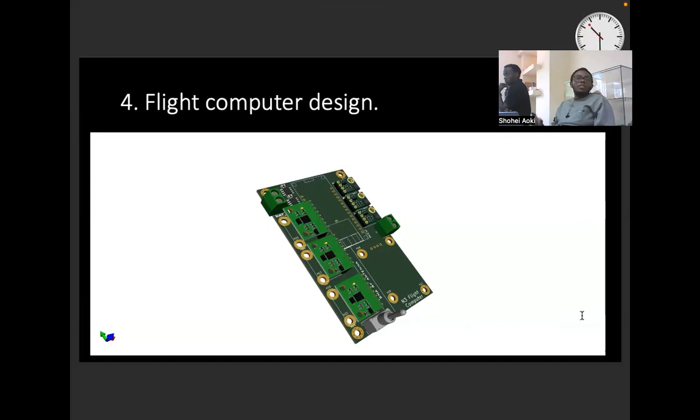Yeah. Assuming we're using the gyroscope, we have 3 of them, each with their values. You have 3 pieces of gyroscopes? Yeah, you'll see it in the image of the PCB design. Using the 3 values, we take the median, then work with that. I see. You have photos? Yeah. You can see the 3 gyros. That was the design. And the next is another, the same. I see. So next, the flight computer now.

We were relying last time on only one signal from one source to do the ejection. This time we don't want that, so we have to be sure that at least a signal has been sent for the ejection apparatus. So we are switching modes effectively, so that in case one does not receive the signal, the other will push the signal for ejection. With this, at least we are sure that the ejection signal will reach and the destruction will be there.

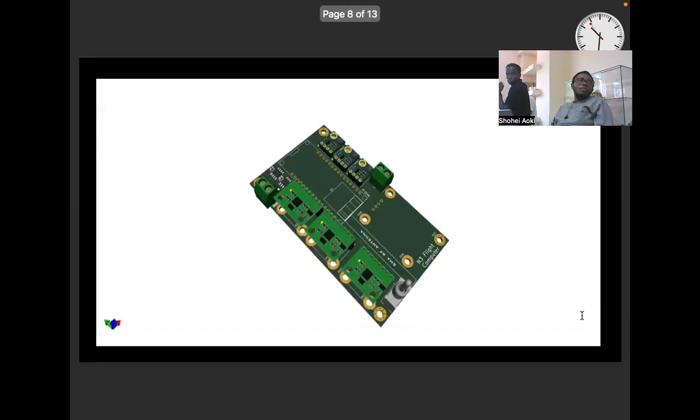So it's actually done, okay. Maybe later I want to see the circuit diagram or schematic, because I want to check the connection of these two MOSFETs.

Yes, I was just curious how this two MOSFETs redundancy works. So you are saying that if one channel is not working, another channel or MOSFET can take over and trigger. Yes.

So we have two MOSFETs for the ejection. The primary MOSFET is supposed to eject. It ejects, and there's a flag in the code that says the ejection has been done. So after a few seconds, as we descend, we can check that flag again, whether the primary MOSFET ejected. If it was ejected, then it's not a problem. But if it wasn't, the second MOSFET has to take over.

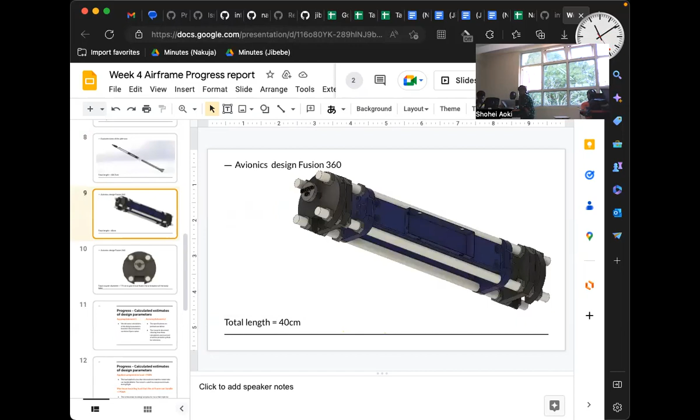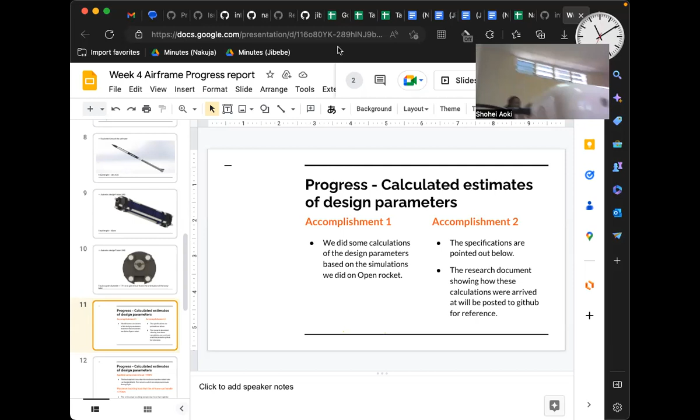Another concern is if the parts aren't assembled properly, it's very sensitive and susceptible to issues - like for instance, if they need to connect, it doesn't actually connect properly. So my concern is if you use styrofoam to create a shock absorber, we might mess things up. We might fail to connect it properly.

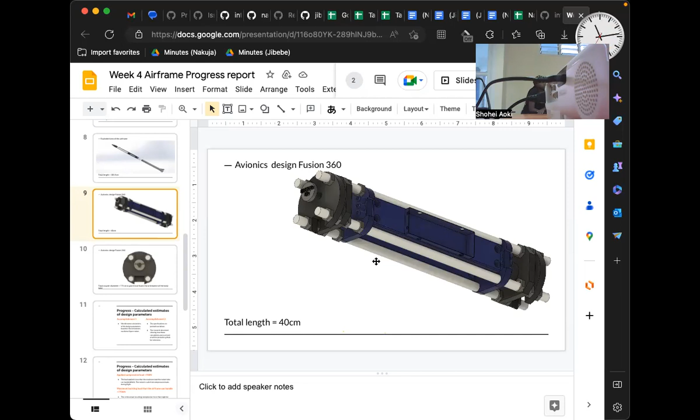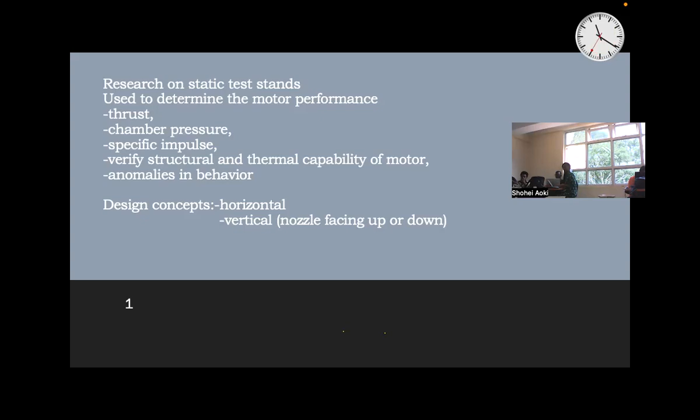So there are three design concepts to consider. There's the horizontal, where we have a motor horizontal, that should be the stand, that is somebody's design we want to use. We also have the option of configuring a stand with the nozzle facing up, that's the development, that's the one we can do. We also have another option, nozzle facing down, integrating one facing down.

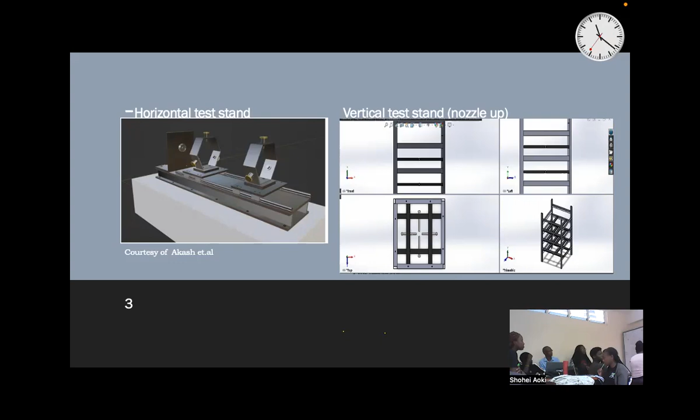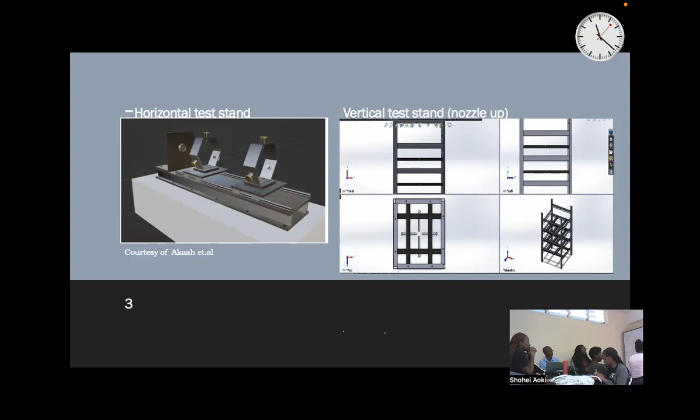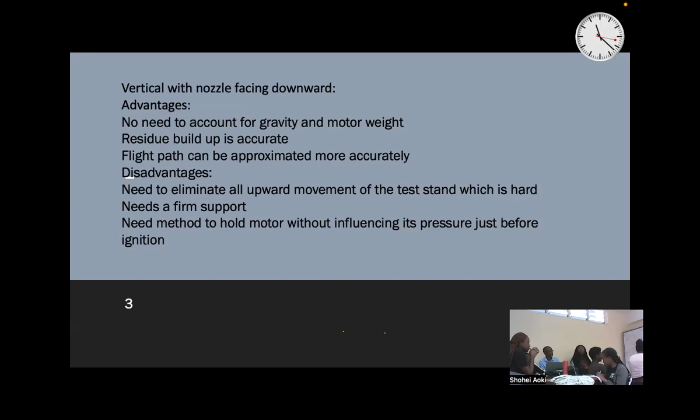So this week we want to design, then models, and then we continue for discussion because we feel like we're taking more time than expected. Last week we finished working together on the motor, with communication with our team on the program. We already identified areas to source materials for the motor, except the casing. We've only been finding out about learning basically the casing. We can really have the idea that we drill and then... it's good.

Have you completed the design of the solid motor? Yeah. Do you have the open motor simulation file? So on GitHub, which one?

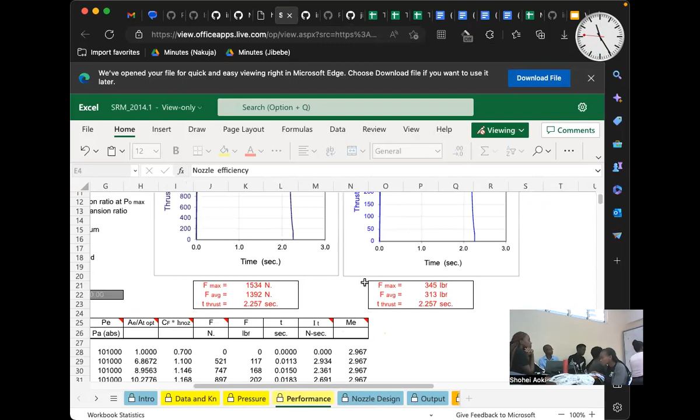So initially we were using 4 cartridges, plus one program, but that was before we understood what the other teams were doing. So then we got the information that the FM team were considering aluminum. So we had to take into consideration their weight. So we started with assuming a thickness of 2 millimeters for their side. We calculated the weight using aluminum 6061.

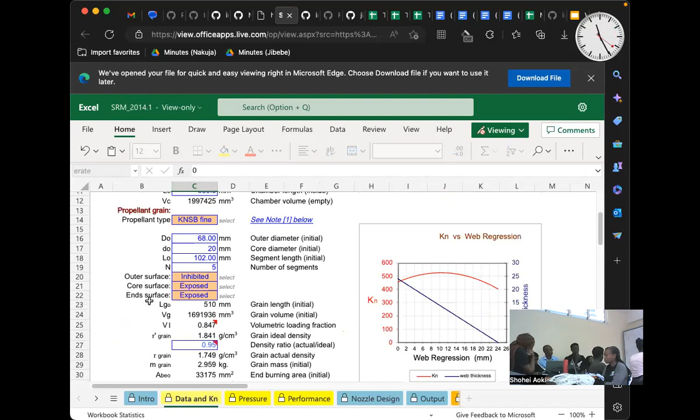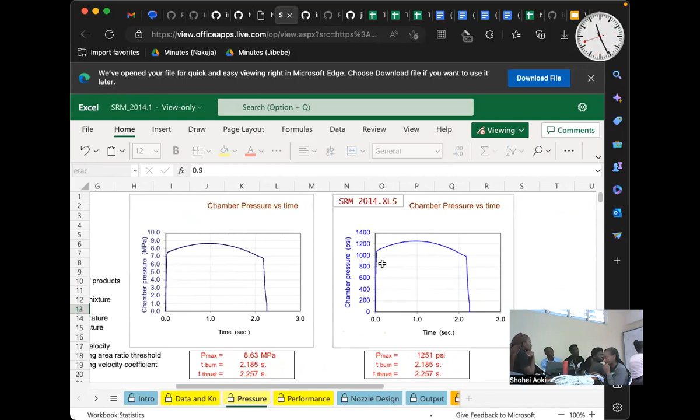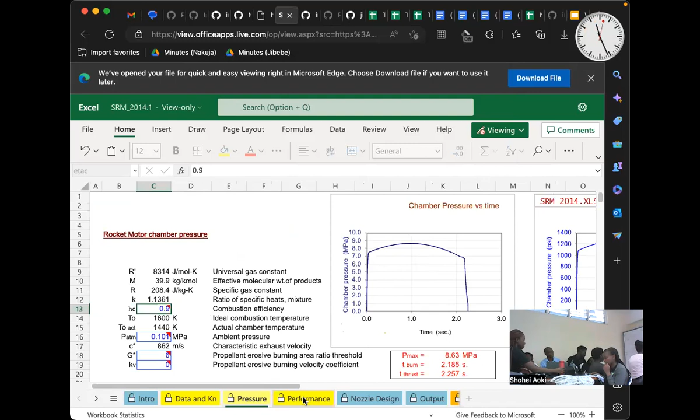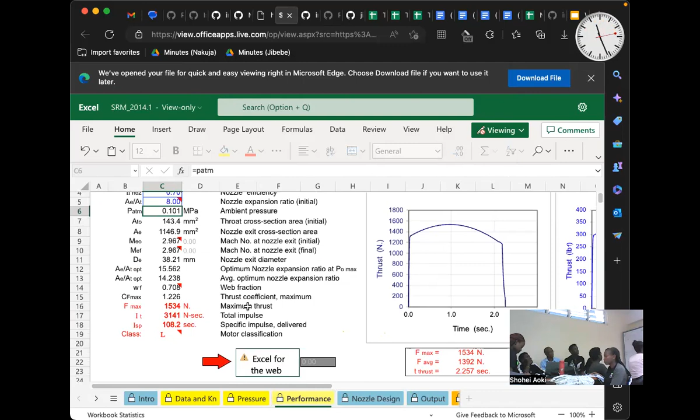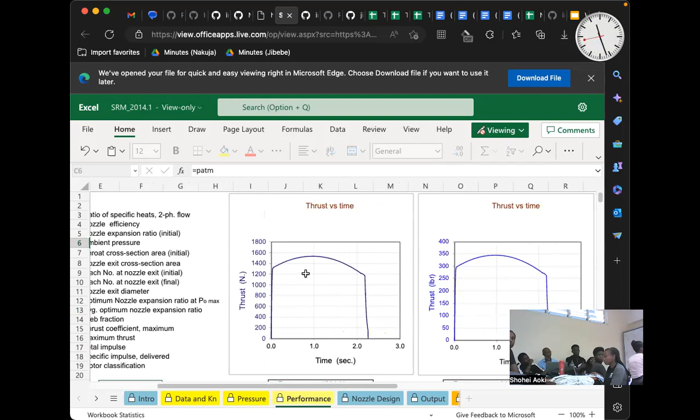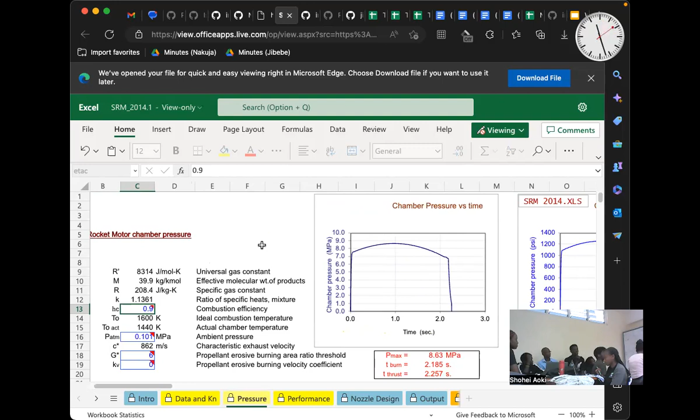Do you remember the maximum pressure for the N2 motor? 5.4. Okay. So it's 8.5 now. It's increasing, right? Yes, the pressure has increased, but we accounted for the pressure because we're using a 3.5 millimeter wall thickness, aluminum 6061. The weight is around 1.2 kilograms, which is accounted for. So the total weight from our side is about 6 kilograms.

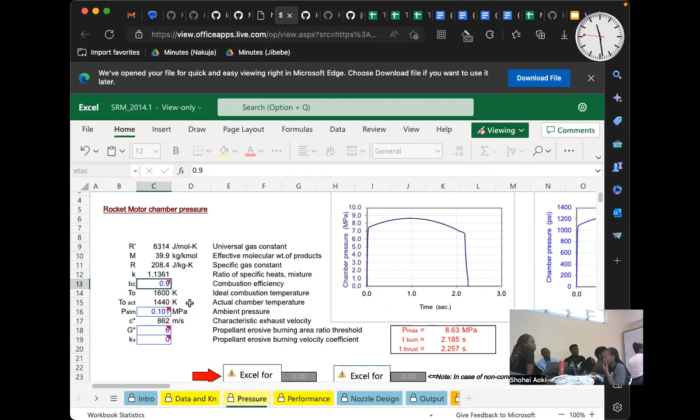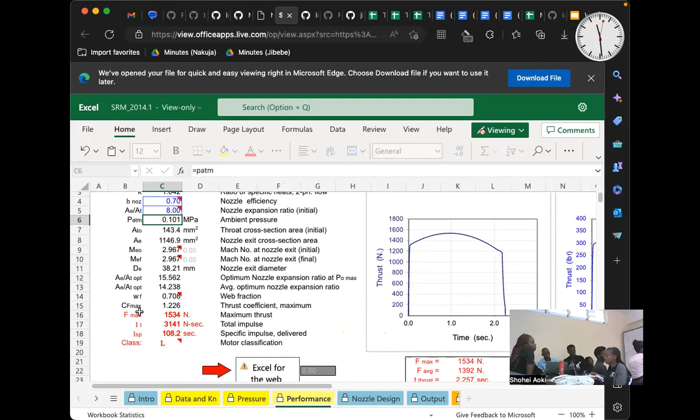Essentially, this is the one that you are still using. The only thing that changed is the design. The design that I have now is L1.3. L1.3, is that the one that you're using? Yes. The mass is 4.674 kilograms. And now the mass is 9.9 kilograms. The one you have is 6 kilograms. It's way higher. Here, the one you have is 5 something kilograms.

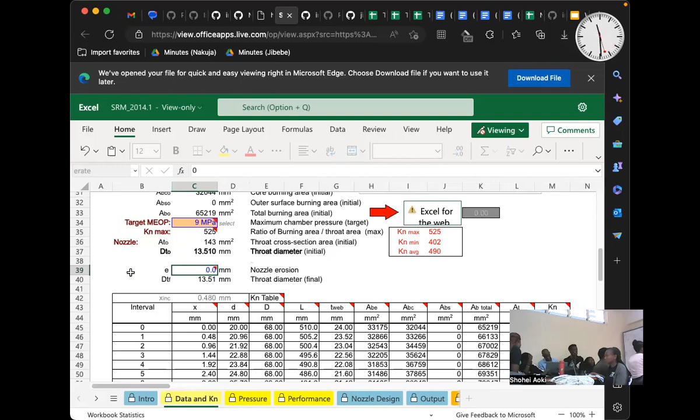In your calculation for weights, you have not accounted for the casing. That is approximately what we get when we take into consideration the mass of the rocket, and yes, that's it. But adding everything, it comes up because you're using a steel body. Actually, if you check it, you will see the reason.

So we believe that we're going to create an Excel file that we can upload, where we can put all the specifications, and those will be the set specifications we want to get from them, so that you can rest assured we won't change anything. I believe that's a better way. We want to make sure the amount of thrust that we need to reach 2,000 meters. If the values are not going to change, we will need to go back to OpenMotor and possibly reduce the weight.

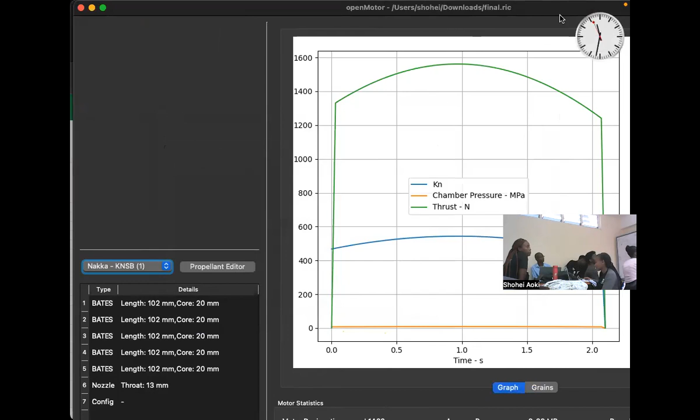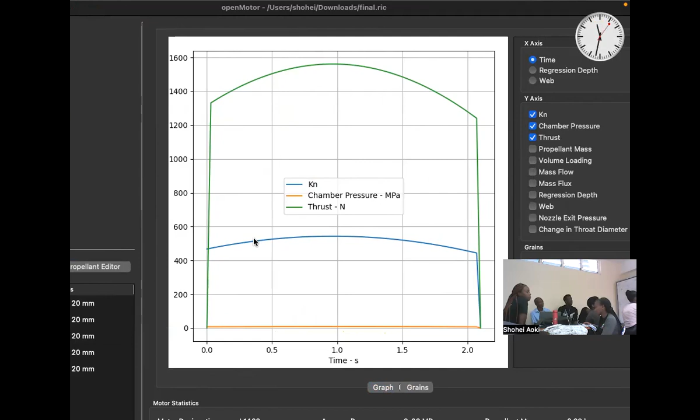Actually, you can propose we have some meetings there. So yeah. I think you should communicate well, because my intuition is this solid rocket motor is way above our expectation. So I think we should sit together and discuss. Then I just wanted to see. Oh, it is not showing full. And run the simulation. Yeah. Okay. Yeah, it's okay. So yeah, that is basically my comment.

And quickly, I want to go through your tasks. So the Gantt chart is on the meeting minutes of last week. Let me see. The minutes of last week is Nakuja second week. Yes, we are opening the link. Sorry, propulsion, this one. Yes. Yep.

Okay, maybe you can generate the PDF. I think, let me try. Oh, is it? Oh, yeah, it's visible. Now you are here, and the task you're working on is static test done. But anyway, you still need to finalize the design of the motor. So please adjust. And okay.

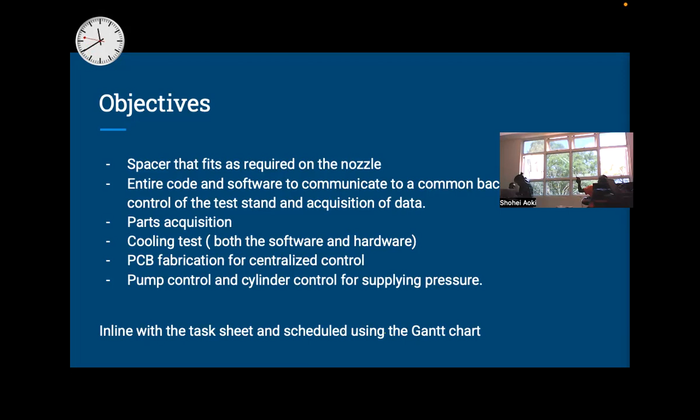We had some previous challenges, such as communication between the register and the computers they were using. There were also some parts that we required. For the cooling test, we also had to work on the software part and the hardware part. And there is the application so that you can integrate all of that: the communication, the control, and everything. The cylinder control should be part of the software.

For the software, since we're using new sensors, we had to modify it, and there were some previous challenges. So we were able to modify the software, and now what's required is to test it. For parts acquisition, we were able to apply. We were also looking at the parameters, since the parameters of the previous team had a very narrow range, so we had to start looking for new ones.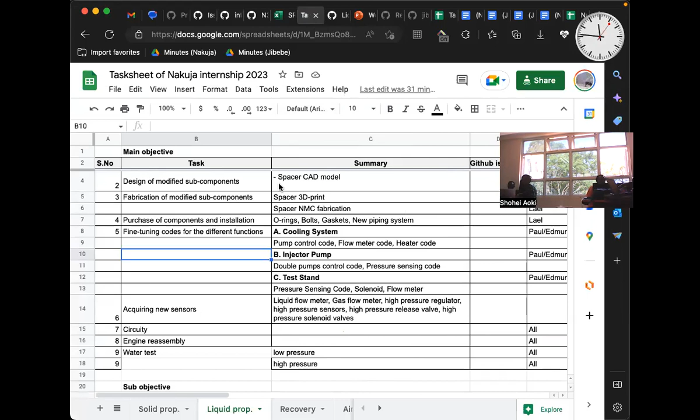Now it seems you completed the preliminary research, designed some components, prototyped some components, 3D print. Have you completed? It's related to the spacer. Yes, it's completed. Oh, anyway, I forgot important things. So you're listing the tasks like this, right? It should be synchronized, this one and this one. So I was just wondering where is this prototyping of subcomponents, but it is this. It's okay. Basically it is synchronized. I think it's okay.

But maybe this one is an announcement for all teams. In case of any challenges, please let me know. We can set a meeting in addition to this meeting, team by team. So please let me know if you have any challenges. You don't need to get stuck. Please consult me first. Oh, now my battery is low, so I want to wrap up this meeting. The time is almost 2 hours. Do you have any other business, AOB?